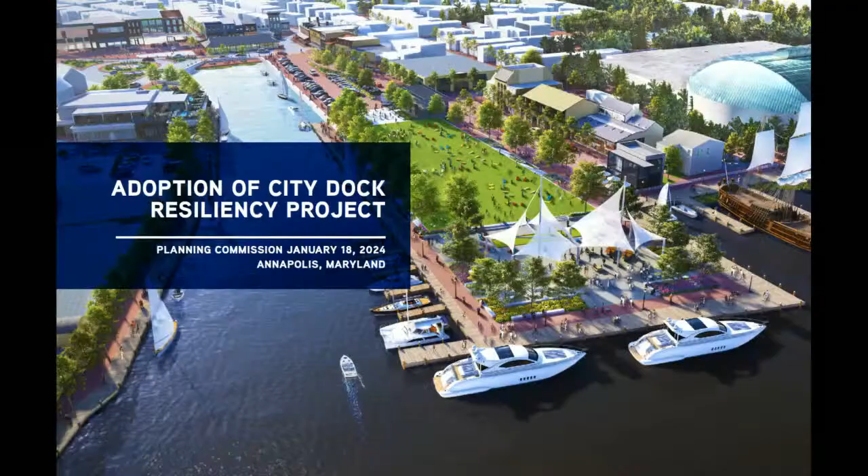The application tonight does not include the Welcome Center, the Burtis House, or the Prince George's Park at the end of Prince George's Street. It does not include that. What it does include is all the rest of the park and the resiliency construction that's going to be proposed as a part of this major project. So in your comments tonight and in your thinking tonight, you need not, and please do not, bring up the issues of the Welcome Center, the Burtis House, or the Prince George's Street End Park.

That will come at a later time when it's gelled and ready for consideration, and it will come before this commission just as what's coming before this commission tonight. So, edit your remarks accordingly.

This is an informational session, as well as a final decision will be made on whether the project's to be approved or not, or if it's to be approved under and subject to any conditions. But it's informational for the commission, not all of the commissioners have been on the commission for as long as this process has been under consideration.

And it is informational for the public who are sitting in this room, and it is informational for the people who are watching through television. So listen up, think about what questions you have, and we'll have an opportunity to ask those questions and hopefully receive answers. At the conclusion, after the public hearing portion of this session, either tonight or if it's required, we'll go to a second session, because there's time and there's patience to hear everybody and everything. And at the conclusion, there'll be a final decision by the Planning Commission. It does not go to the council, it's a final decision by us.

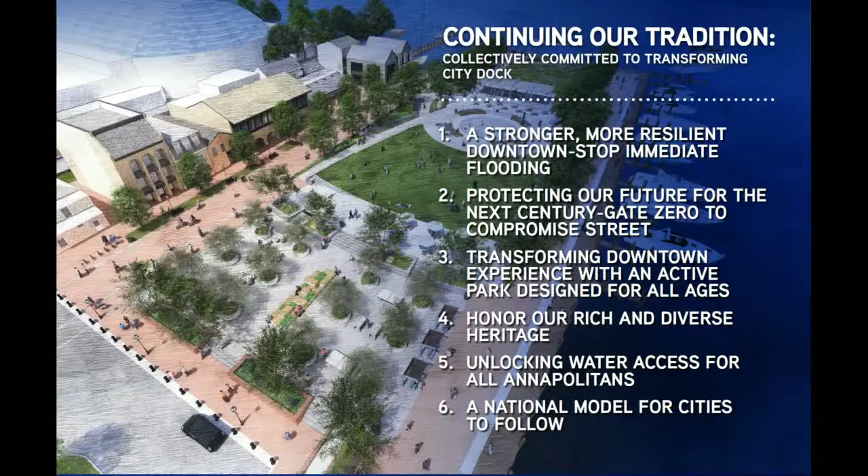Today, we are really confronted with the need to continue the tradition, and that is the tradition to transform City Dock. We have had many, many people in the community, the commission, our city council, our City Dock advisory group, all looking at the issue of what is the need, what is the best use right now for our city dock.

What you will see in the presentation from both Scott and from Derek is that we've heard a resounding request to immediately stop the flooding, to build a resilient downtown along with our partners at the Navy, to transform this parking lot into an active park to be enjoyed by everyone, to finally, in a fully embraced approach, celebrate our diverse history, and Chris Haley is here with us tonight to address that, and to unlock water access for all Annapolitans. The result has turned out to be a waterfront that is being viewed as a national model even as we speak tonight.

It is, we've been saying this for 5 years now. We started this effort in 2019. Mayor Cohen had an effort that started, I believe, in 2011 and coming forward in 2013 with the same request. It is time for action now.

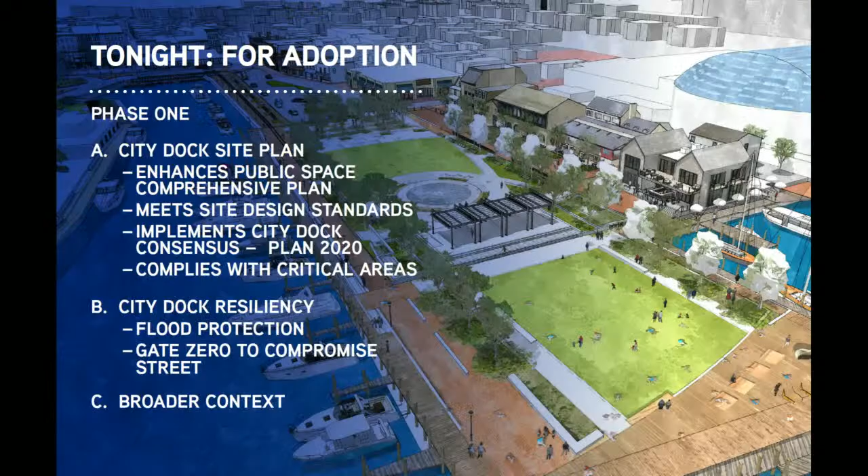Tonight, for you, for the commission, we are bringing forward for adoption what Tom correctly referred to as Phase 1 of the City Dock project, and that is the site plan, the resiliency, and then Bryce will also discuss a little bit on the broader context, how all of it plays together.

On the site plan, you will see that it not only meets but exceeds the comprehensive plan's desire for enhancing public space. It meets the site design standards in our code, as Tom has just expressed. This document implements the City Dock Consensus Plan from 2020, and it complies with critical areas.

We've just received a letter from the Critical Area Commission. For resiliency, Derek tonight will talk about, Derek and Zoe Johnson from the Academy will talk about flood protection from Gate Zero to Compromise Street.

When we look at what we've gone through in a positive way, how we've reached this point together - the commission, many of the people in the audience, and certainly the entire professional team at the city, and with our professional partners here from AMRP - it's been an extensive process, starting in 2019, adopting a consensus plan in 2020.

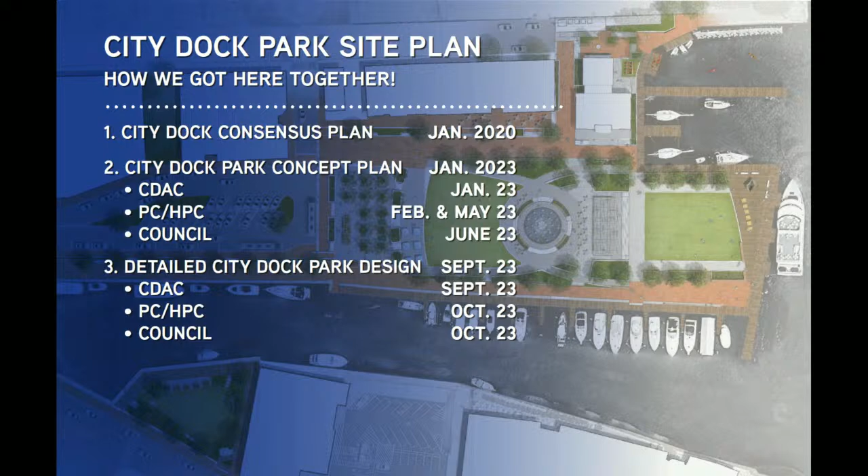Just the site plan alone, the dates up there are just for the site plan. The site plan came out last January 2023. The commission has had 3 meetings on it. The council has met on it. The City Dock Advisory Committee has reviewed both the conceptual plan and then the more detailed site plan, which is before you this evening.

I think most importantly, through all of this process, the city - both the city staff and this professional team - have been listening to everyone's comments. Just in the past year, we've had over 80 outreach meetings alone.

We've had ward meetings throughout the city. We've had stakeholder groups such as Downtown Partnership, the Maritime organizations from both the county and the city, Historic Annapolis, Ward 1 - the list goes on, and stakeholders.

What everyone we have heard has said the same thing, that now is the time to meet the needs of all Annapolitans by transforming our city dock from a parking lot into - and I will let Scott now describe what it is being transformed into.

There you go, Scott. Thank you, Eileen. And good evening. It's nice to be here in person for a change over the last couple of years and see all of you in person.

As Eileen said, I won't belabor it, but what we heard from the CDAC Commission was this was to be a place for all Annapolitans. We were to reflect the legacy of Annapolis, to be a world-class urban park, improve access to the water, increase the tree canopy for downtown, and protect downtown from flooding. I think as I take you through this, you'll see that we've done all of these things with the current plan.

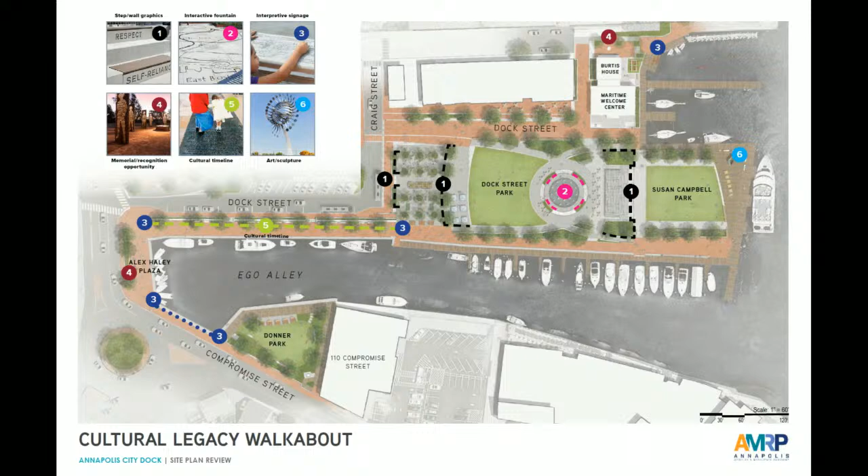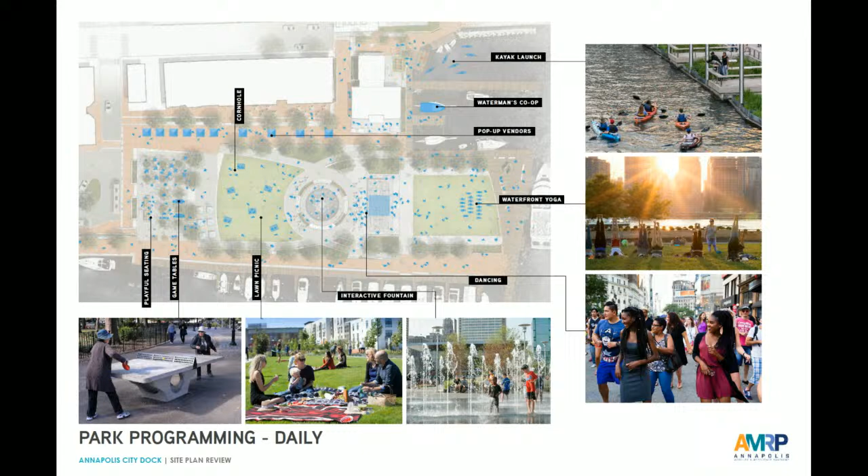We've got tents along Dock Street, like little booths. We see that as potentially pop-up vendors, or even the farmer's market could go there. So we really see this as an indication of how the park is used on a daily basis.

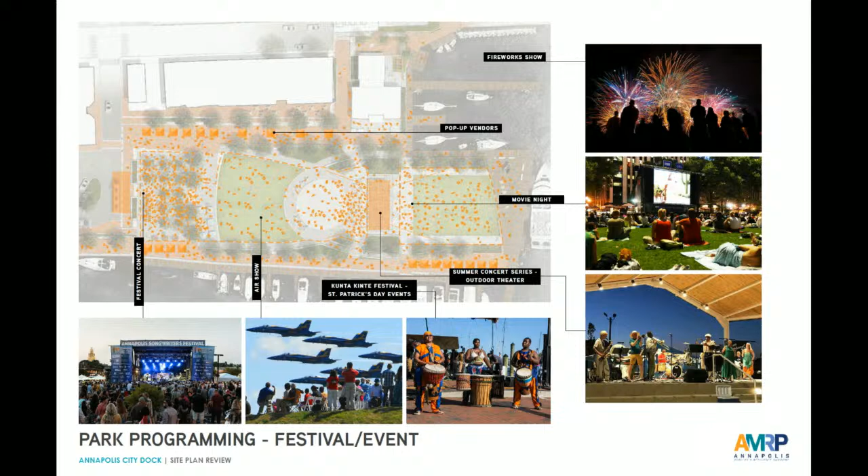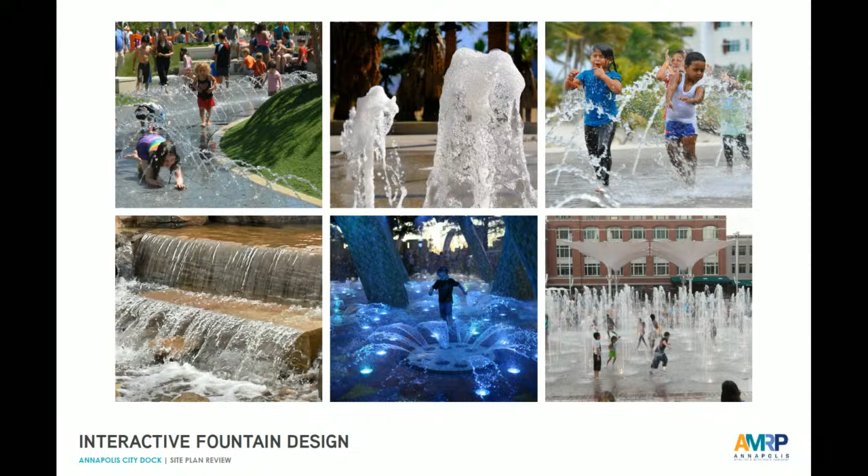In the interactive fountain, we're in the middle of concepts right now, designing what will be incorporated, but these are just some of the effects meant for kids to be in it, and all of these are effects we might see in the ultimate design: low arches that kids can crawl under and through, small falls maybe 12 to 18 inches that kids can sit upon, fan jets that squirt out in different ways. They're all basically gentle waterworks, and it can be a pretty dynamic fountain, particularly at night.

And then we'll get into the view sheds. All of the pink arrows here are views that we've taken, and I'm going to take you through them. We'll begin at Market Street, letter A, and go clockwise up to the Maritime Welcome Center, back down Susan Campbell Park, all the way to Donner Park, and to Main Street is where we'll end. We have images of each of those where we've taken a photograph at that spot and then done a rendering of what you would see once the park is developed.

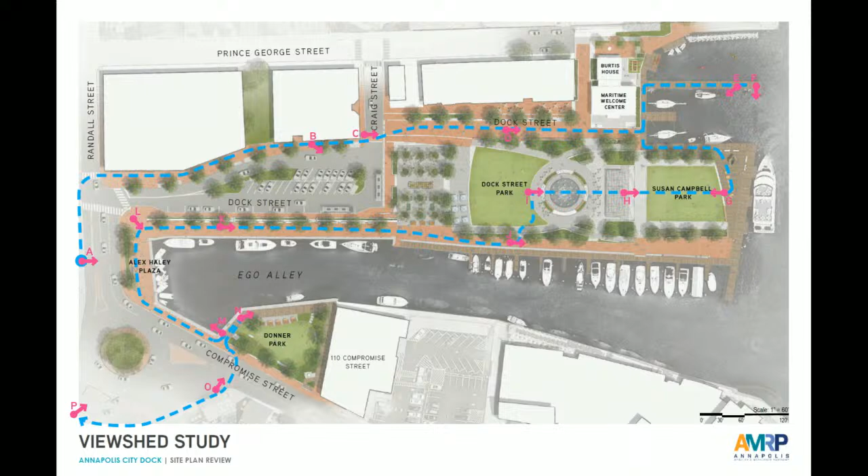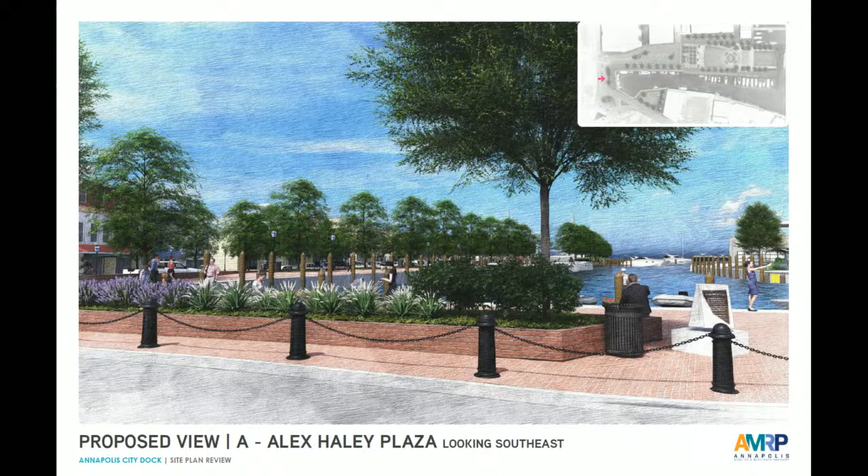So here we are, my back's to the market. We're looking across the street, Randall Street, to Ego Alley and the Alex Haley statue there. This is the planter we've designed. There'll be a seat wall on the other side of this. It's basically a way that we've created a walkway there, and then you can see the promenade of trees going down Ego Alley all the way out to Susan Campbell Park.

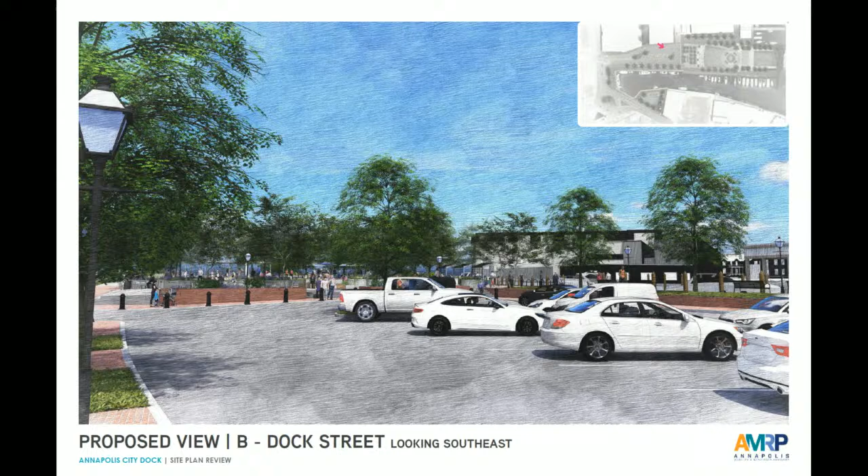This is Dock Street looking southeast, so I believe we're about at the ice cream shop here, and you're basically looking at cars and more cars. What we see now is Dock Street going through. You see those bollards there - that's where it becomes all pedestrian, and then the trees filtering the views across Ego Alley.

This is looking Dock Street southeast, so we're looking down Dock Street. You've got the Harbor Master building on your right - that's no longer there. This becomes a pedestrian street, or a Woonerf. It's a curbless section, so it really is meant to be all pedestrian. Obviously the bollards can drop for emergency access and loading and unloading when we have events there, but it's really meant to be a pedestrian space.

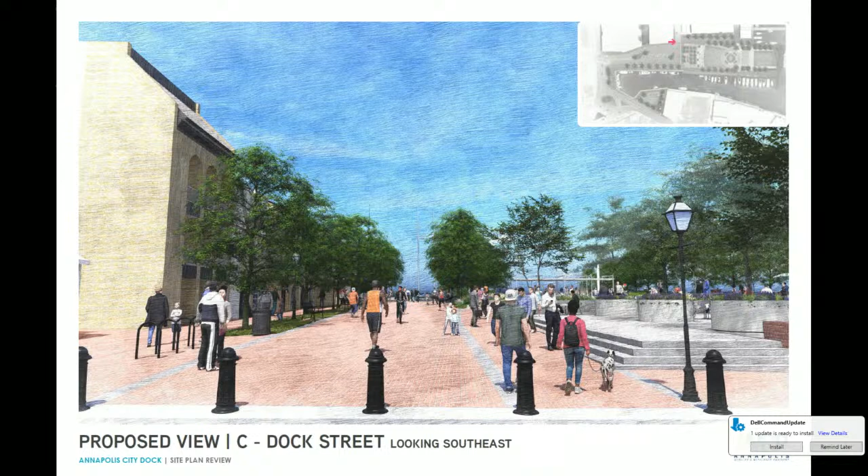We step up to that activity area. You can see the trees and round planters there, and then the improved streetscape going down Dock Street. Now we're further down Dock Street towards the end.

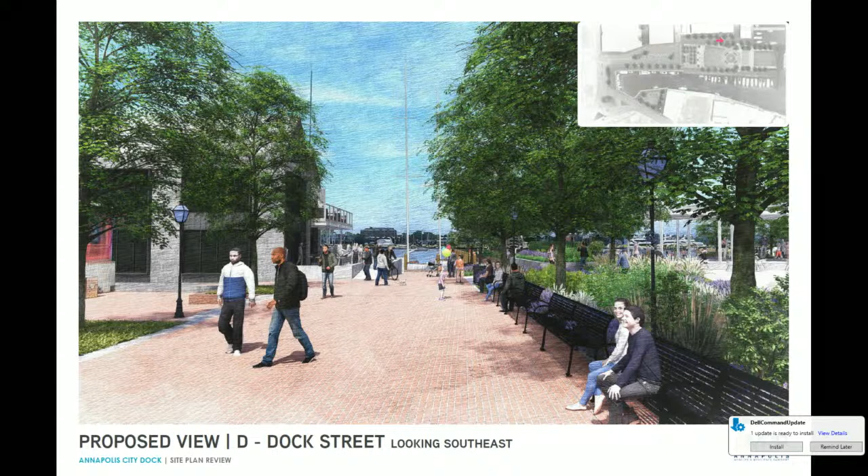And this is the view. So you still have that straight view over to Eastport. We've got trees on both sides, creating a nice streetscape. We've raised the level of this street to be equal to the level of the park, so we're up about 4 feet from where it currently sits.

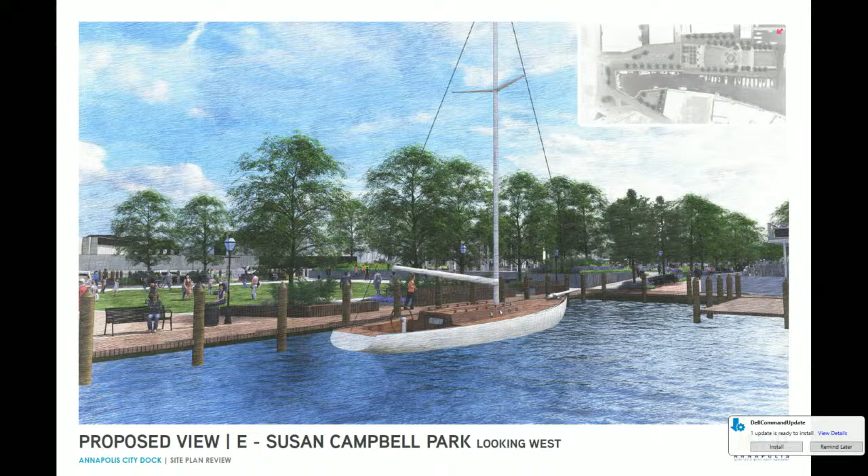This is looking across the water back to Susan Campbell Park. And you see that promenade again. You see Susan Campbell's become a much greener space, and then the alley of trees going down Dock Street.

Again, looking across to Susan Campbell. Unfortunately, the boat's in the way, but through the magic of rendering, we remove the boat, and you can see Susan Campbell Park, and we've got the wider dock there that will accommodate offloading of the tour boats, and then a beautiful green space, open space with trees flanking on either side.

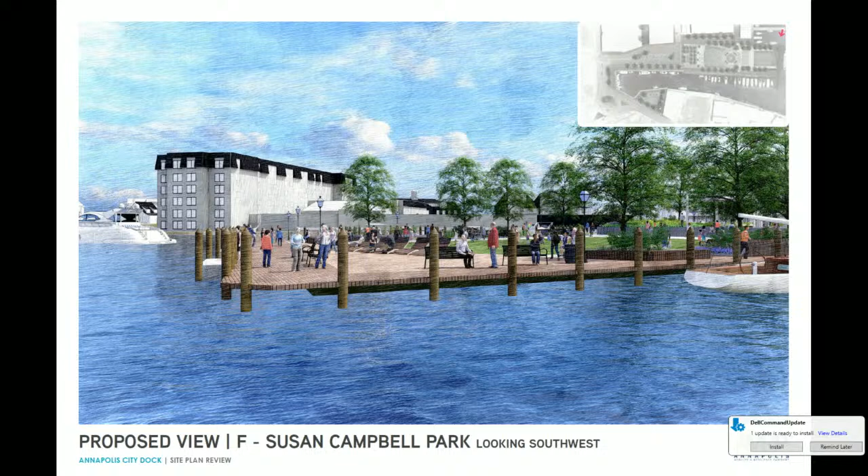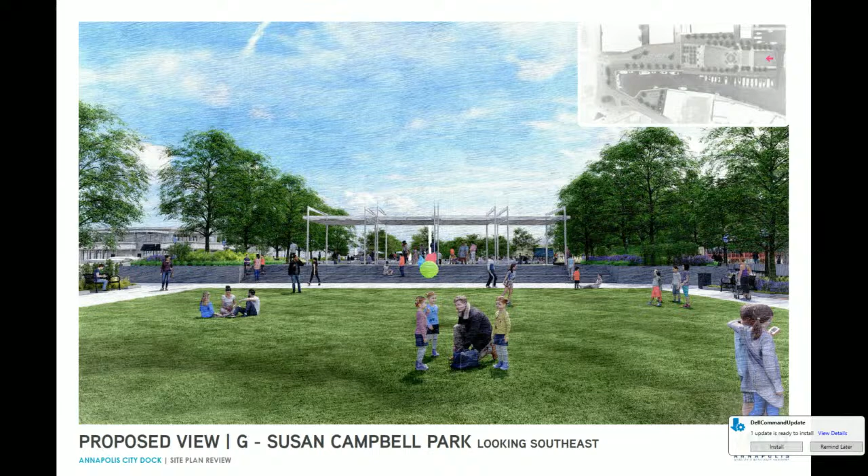And then this will be the view back to that pergola that we were talking about. That's an opportunity for, on a daily basis, it's just tables and chairs in a shaded situation. But on event days, that can become a bandstand or performing, and can perform either way, so it can perform back towards Eastport or back towards downtown.

This is the current view looking out, and you can see the trees actually obscure this view. We've really opened this one up looking southeast. This is the view now. You have a much more panoramic view at Susan Campbell Park because the trees have been moved to either side.

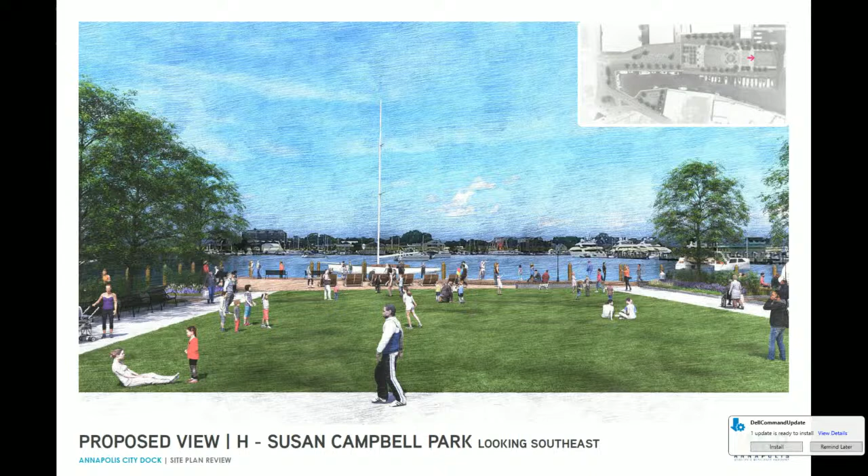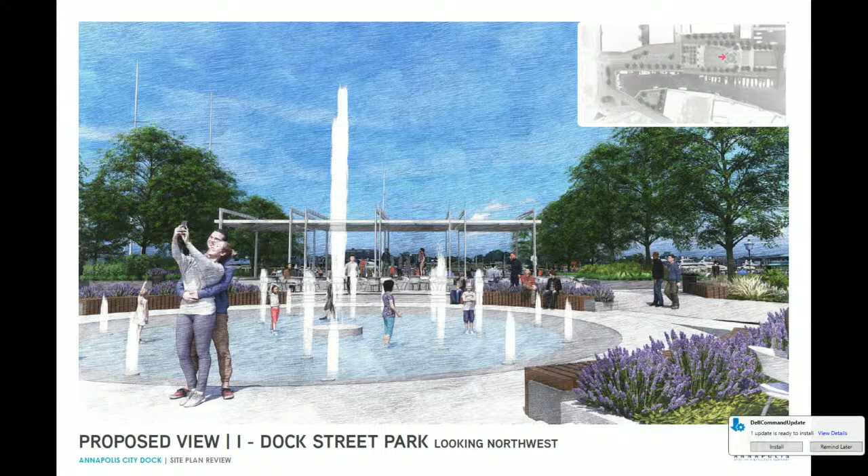And this is the view across the fountain. And you see the pergola just beyond that. And the fountain is recessed, so the fountain gets completely covered in events. There'll be a platform that sits over the fountain, so this space all becomes usable for events such as the boat show and singer-songwriter festival.

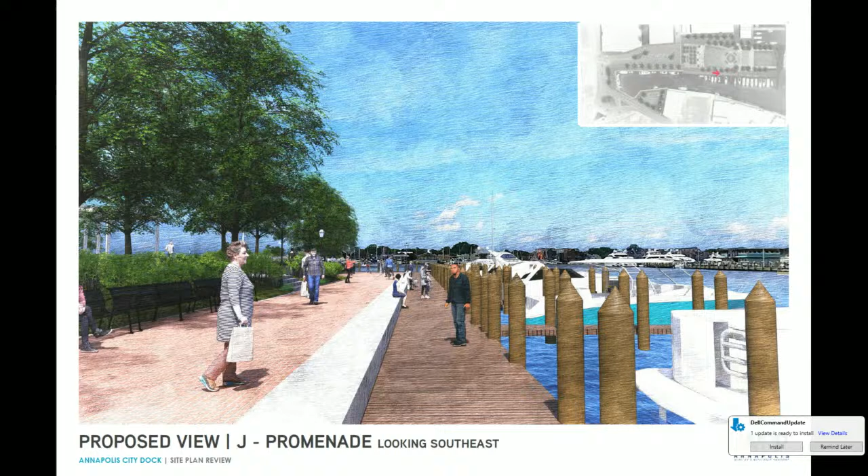We're further down the promenade now, still looking southeast. And you'll see here, you note that the bulkhead is at elevation 5. The new promenade will be raised to that same elevation. So we've raised the elevation.

The promenade now extends over the cars. The parking lot is now below that level by about 2.5 feet. And we've got the trees set back. And the resiliency wall is actually behind the trees, so that will rise up in floods, which Derek will talk about in more detail.

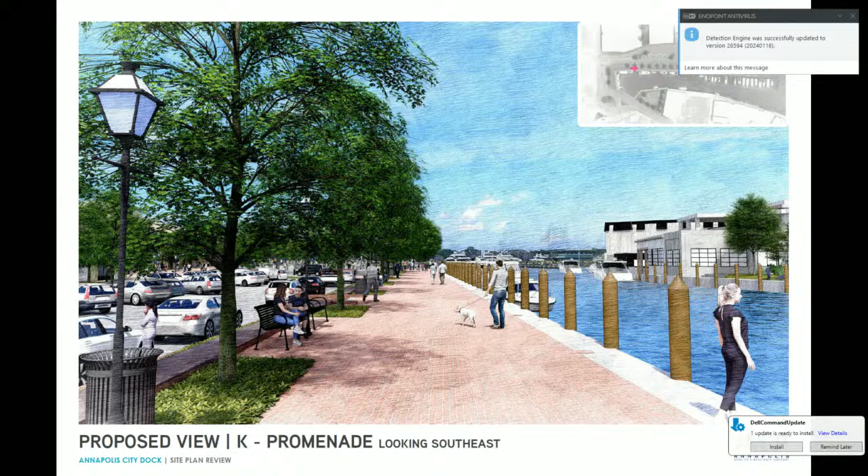And here we are looking at we're back at the dinghy dock, looking up the promenade, and this is where you'll see the transition in the elevation. So here, that is an ADA access or handicap access. So that starts down low, goes up to that level 5, meets the bulkhead. So this is basically a wide ramp there. You see that gray line going through on the lower left. That's actually the flood. Those will rise up straight and become the flood walls, protection for the parking areas.

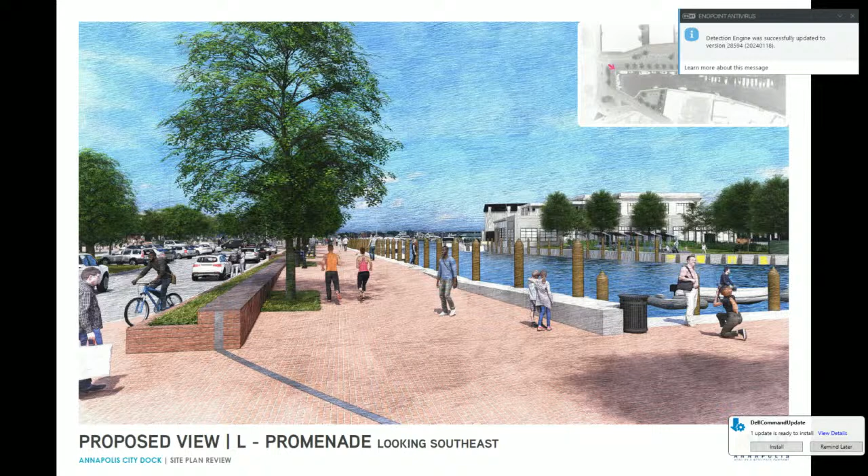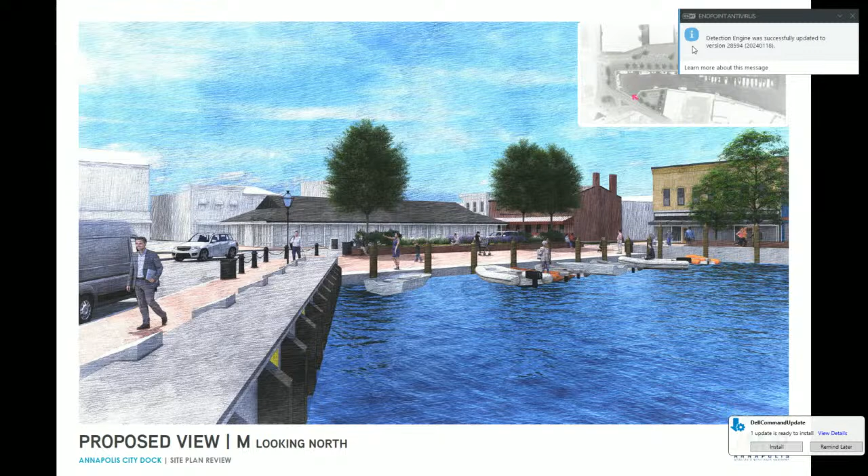Now we're in Donner Park, looking north back to the market house. And dinghy dock gets raised slightly, its current elevation, and then we've got the planter behind that to separate that from the traffic.

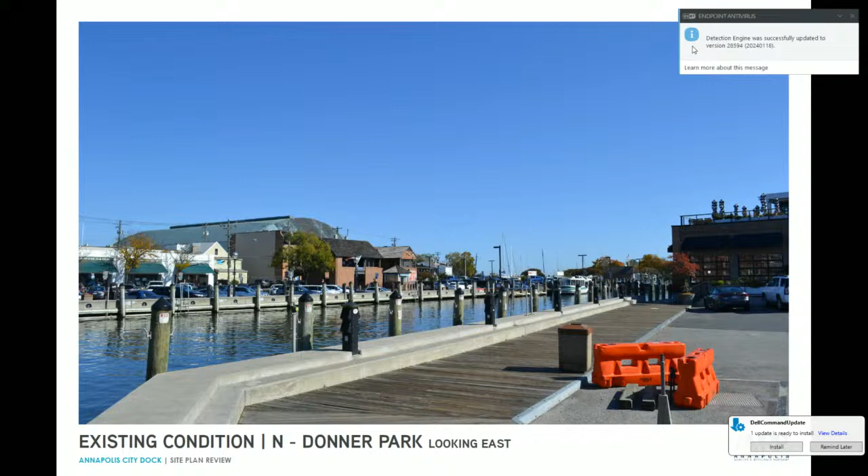This is looking at Donner Park, so my back is sort of to the dinghy dock looking down Ego Alley with Donner Park, and you'll see that this is currently a parking lot, becomes a really nice promenade with covered swings to the right, and then a green space beyond that going out to Compromise Street.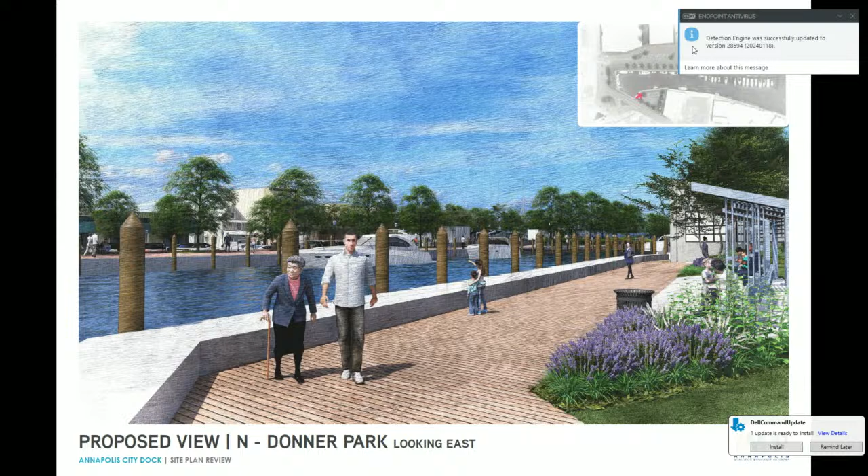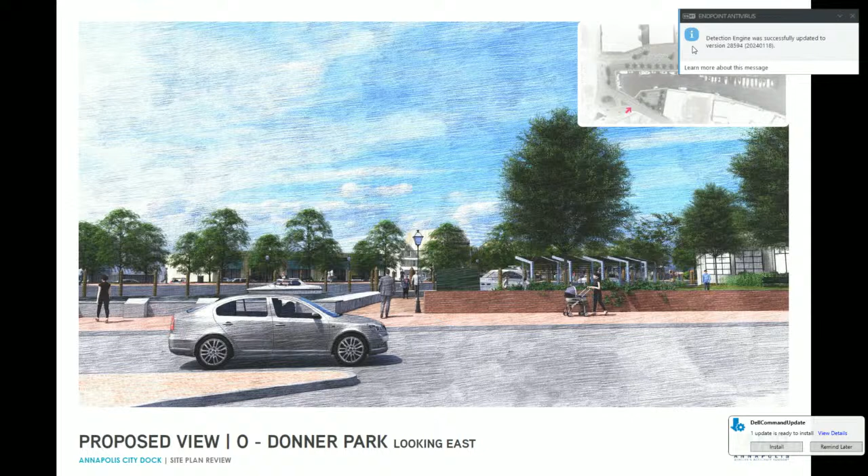And then now we're across the street looking back at Donner Park, and you can see basically, it's a brick wall in front of a parking lot, it'll be transformed to we'll maintain the wall, but then there'll be a green park space behind that with trees, and you can see that the swings that'll face out, you'll be able to sit there on swings and look out into Ego Alley.

And then finally, this is at the base of Main Street. And I just point out that the masts that you see in the center of the picture beyond, they're still very visible when we put in the Donner Park landscape. They're still there. You can still see out to that area. So that's that view.

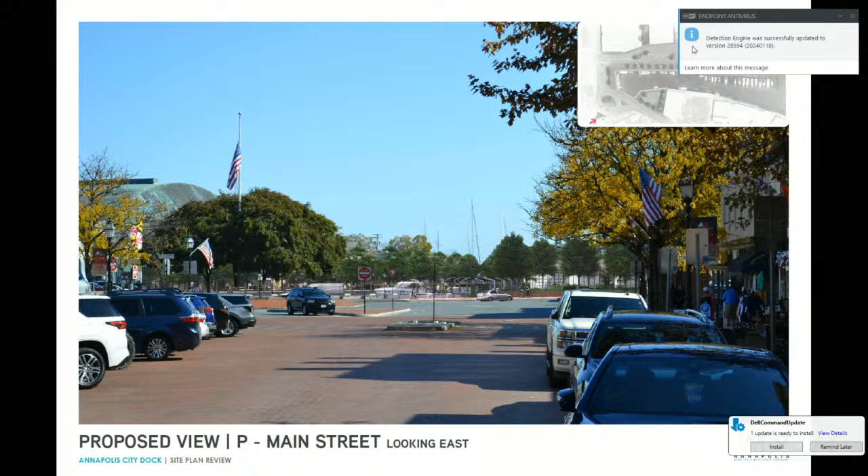Now we also want to talk about the enhanced soil volume under the paving. We're accomplishing two things: stormwater management for impervious areas, but more importantly, from a landscape architect's point of view, it gives these trees a chance. My colleague Jim Urban has been a long champion of connecting the tree pits beneath the paving, so we have expanded tree pits. It allows the tree roots to continue to grow and gives them much more of a natural area to expand their root systems, and you get very successful tree longevity in urban situations.

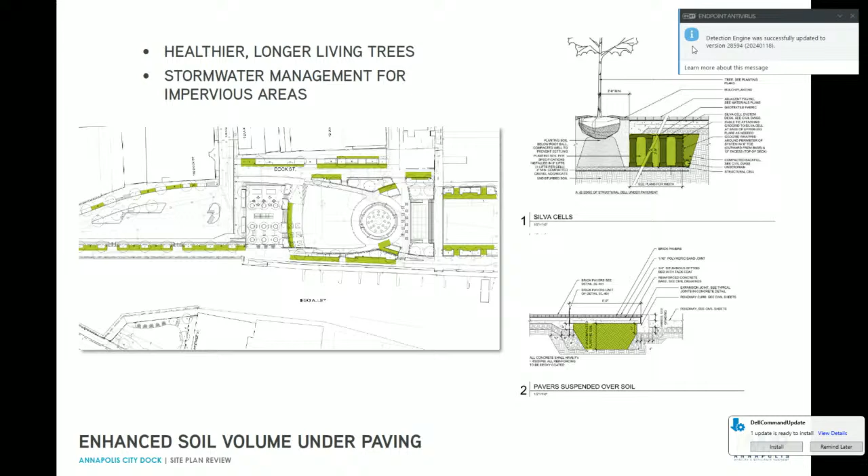This is just color coded. These are all the trees that we're using. They're all native, and you can see the black dashed line, that is the flood wall. Some of these trees will be in the flooding situation, but as we know, it's only for several hours generally, so they can take periodic inundation. These are native trees, like a swamp white oak for example, that can take wet feet and brackish water.

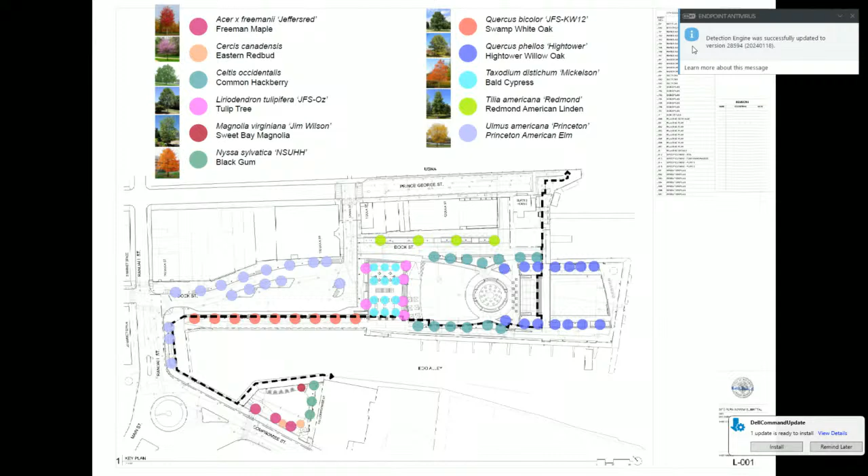So with that, I'm going to turn it over to Derek, who's going to walk through the slides.

Thanks, Scott. I think those images comparing existing and proposed conditions are very compelling to show the change. So I'm Derek Piper with WSP, and I'm the project manager for the engineering design team.

We know that protecting and enhancing City Dock is imperative for advancing the maritime, cultural, and legacy history of the city. This project essentially involves redeveloping an existing waterfront parking lot into a world-class public park. As Eileen mentioned, the project is consistent with the city comprehensive plan, which is organized around three main ideas: preserve and enhance community character, maintain a vibrant economy, and promote a green Annapolis. The proposed design maximizes public access to the waterfront, enhances the City Dock open space for multiple different public uses, and balances the needs and interests of residents, businesses, and events.

The project includes implementation of a flood barrier system to reduce impacts from flood events, just like the recent flooding event that impacted City Dock here a couple weeks ago. I'll talk more about the flood barrier system in a minute. The proposed design complies with city design standards for major projects, including a litany of very specific issues.

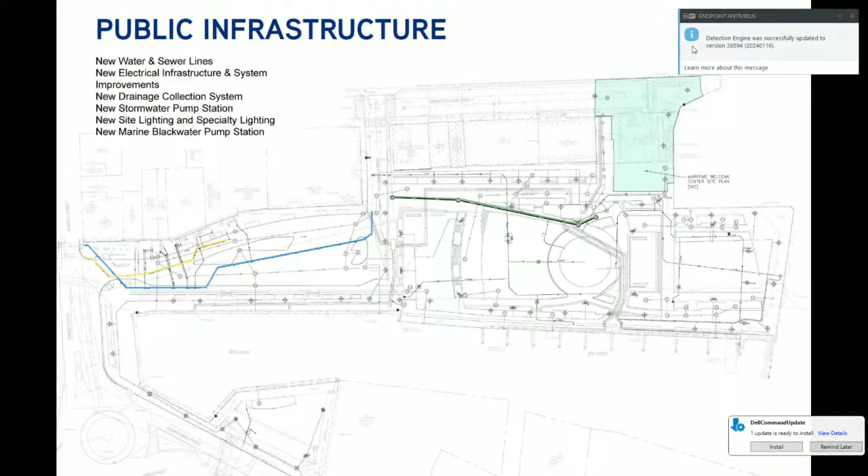Good evening, Chair. Good evening, Planning Commission. It's a pleasure to be here. I'm here tonight representing Christopher Schwartz, Commanding Officer and U.S. Navy Captain of Naval Support Activity Annapolis. He's under the weather tonight, so I'm here and he sends his regards.

We have had the pleasure since 2019 of partnering with the city on the City Dock Resilience Plan. I actually served as co-chair for the City Dock Action Committee's Consensus Plan Resilience Work Group. We have a partnership in that I participate and coordinate with the city, providing my expertise and the Naval Academy's faculty expertise on sea level rise and climate change planning, as well as inviting the city to be formal partners of the Naval Academy's Sea Level Rise Advisory Council.

We both have been developing plans simultaneously to protect against shared vulnerabilities from rising sea level, climate change, and stormwater, and impending coastal storms. As evidenced last week, we both share the same vulnerabilities, and we share a shared property boundary at the heart of City Dock along Prince George Street, as well as King George Street.

Like the city, we have developed a comprehensive resilience plan we published in 2022. It shares a number of the same planning principles and resiliency design principles that you're going to see tonight as part of this flood control plan for the city. We rely, and the city relies, on a defense-in-depth approach, not relying on one flood protection measure but multiple. They both include components of phased elevation increases that can be increased over time with rising sea levels, and components allowing passive increases in pop-up barriers so you can maintain public access on the city side and the Naval Academy side.

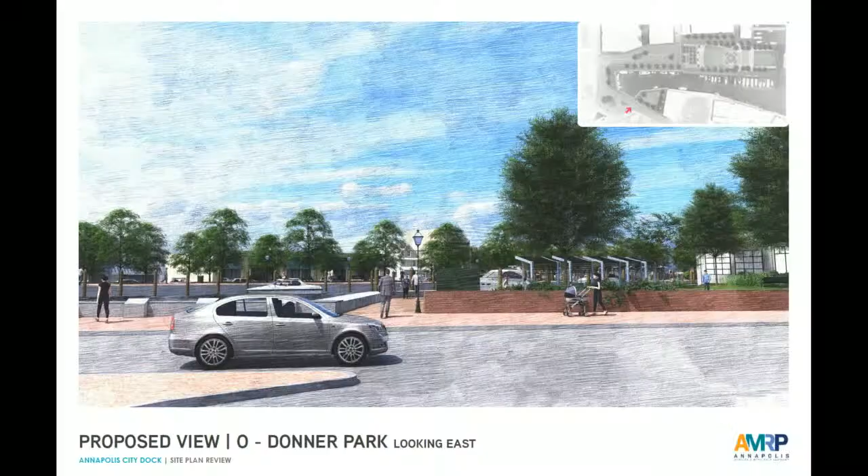Well, I should say that we actually have an entrance to the left, an entrance to the right, and we will have one in the center. That was one of the requests, was to have a 12-foot opening in the center. So really, it's pretty pervious. So why do you even have the wall? What, other than it being there already, why not get rid of it? We probably could, it's just demo.

It's more, but what I was getting at is there's not an engineering need for it, or is it just legacy? No. Okay, so that's something to think about. It sort of opens it up a bit.

Another question about the review material. There was a document with 10 pages of comments from different departments. This is a question for Mr. Smith about what the disposition of those comments would be. In the package we have, those comments from that document are not included. Is that the right way to look at it? Staff from other departments looked at the plans we were given, came up with those comments, and they haven't been folded back in.

I think what you're going to see is those comments addressed as this project continues on, as we get into permitting phases and future phases of detail and further design.

Some of the things I wanted to address reflect a lot of those comments. As we've worked in the past with applicants that aren't the city, when there are things we think need to be addressed, in the past we've said we put them in conditions, and sometimes they get done, sometimes they don't. So if there are things we're going to want changed because they're important, we're going to want to see those changed.

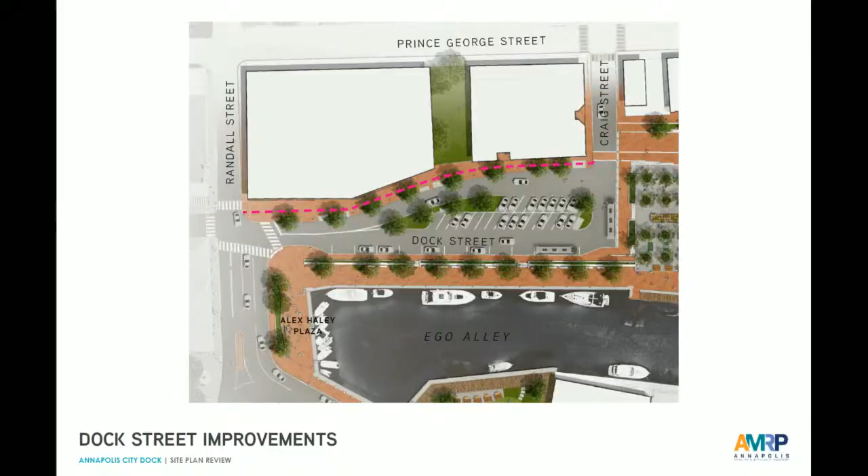Anyway, I think that's all we have to say about that, but maybe you can think more about it, since we'll likely discuss it in our deliberations. I think it's a legitimate issue, but design teams work very hard, as Eileen mentioned, to meet with numerous stakeholders, and this is another stakeholder. We tried to listen and be sensitive to their concerns too, balancing a lot of different things. I've paid attention to this discussion for the last few years, so I understand.

One question about the fountain. One of the things that's come up with a lot of the fountains in the DC area is this idea of dipping your feet versus swimming. It's a big argument - do you foresee any problems with that? This could be a couple inches deep there, possibly up to 2 or 3, but I think the fountain designers are really envisioning a scrim of water - more of a splash pad idea, like the famous fountain in Millennium Park in Chicago, which is just a big plane with two jets spitting into it. That's the type we're looking at with draining. I would caution you not to make it deep enough that it could be considered swimming, because then you get into this whole discussion of dipping versus swimming - it's like a Pandora's box you don't want to open. So that's something to consider also.

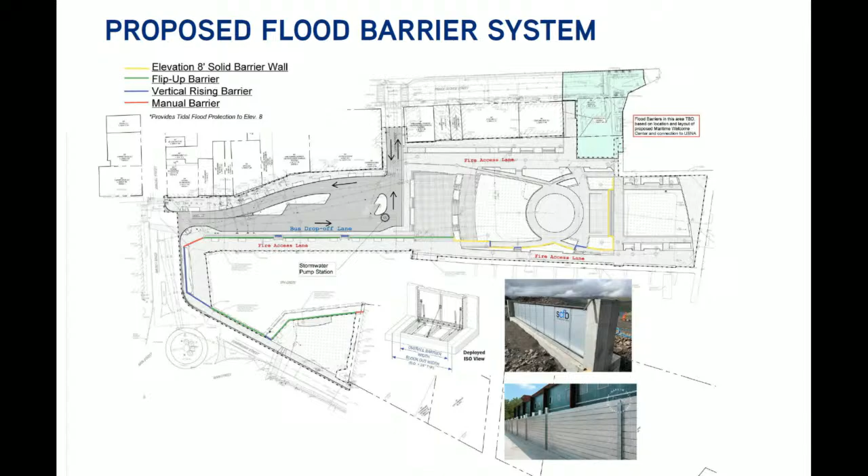Okay, thank you, Mr. Piper. So what I'm gathering is that perhaps Mr. Vogel, the head of the Department of Public Works, is the person to answer that question? Yes, that'd be correct. Well, we'll take that under consideration as we design our schedule. Thanks, good. Thank you for that answer.

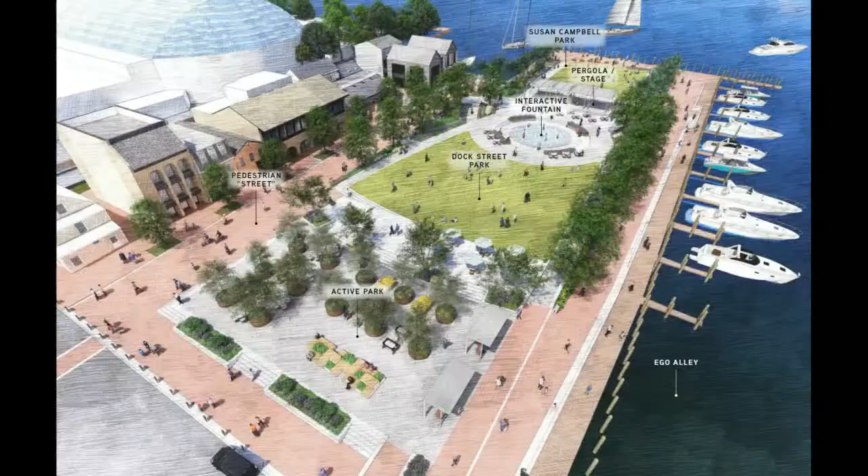Dock Street? Sure. Again, it's identified on the screen behind you as a pedestrian street. Oh, you mean from Craig Street to the water? That's correct. My question would be, if those buildings that are there today and will continue to be there and be some sort of commercial property that will require lots and lots of delivery trucks, where are those trucks going to park? And where will the delivery dollies from those trucks be ingressing and egressing?

Am I going to have to dip and dodge just to use that sidewalk? Will other pedestrians and tourists be subject to this endless stream of deliveries being made because the trucks don't have anywhere else to park? I hope that's something that you'll consider.

Thank you. I heard you.

Good evening. My name is Elly Tierney. I live at 5 Park Place in Annapolis. I also represent the ward that is significantly hit by flooding.

I was not going to speak. I didn't have a testimony, but I feel the mayor—I'm channeling the mayor right now. He's not here, and I know what he would probably say. I shared most of the morning with him during that flooding. We were both down here during high tide, and anyone who was down there at that time and saw the power of that water would say, with good reason, perhaps postpone, or what have you. No, there is so much power in that water.